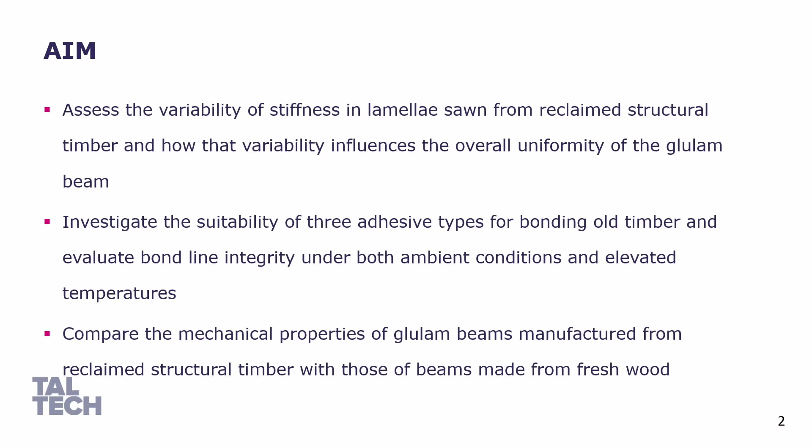I started with a review of literature, and then I documented all of the test specimens that we had: 39 lamellas from Norway spruce that were collected from the demolition of an approximately 100-year-old log house located in Norway.

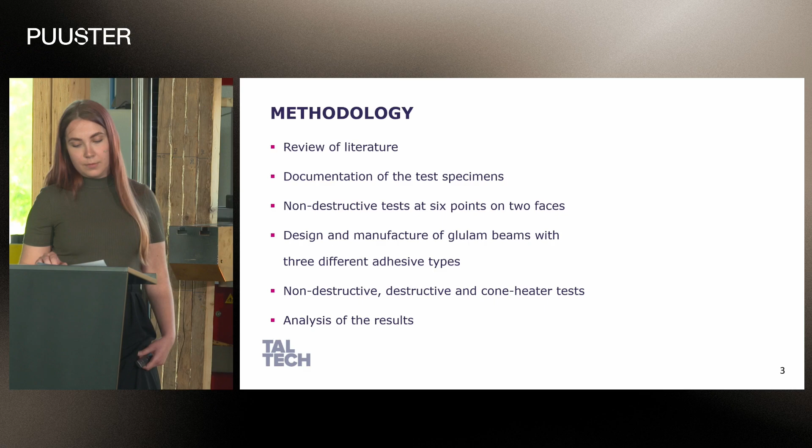Then I did 4-point non-destructive bending tests on all of the lamellas, on 6 points and 2 faces, to find the global MOE.

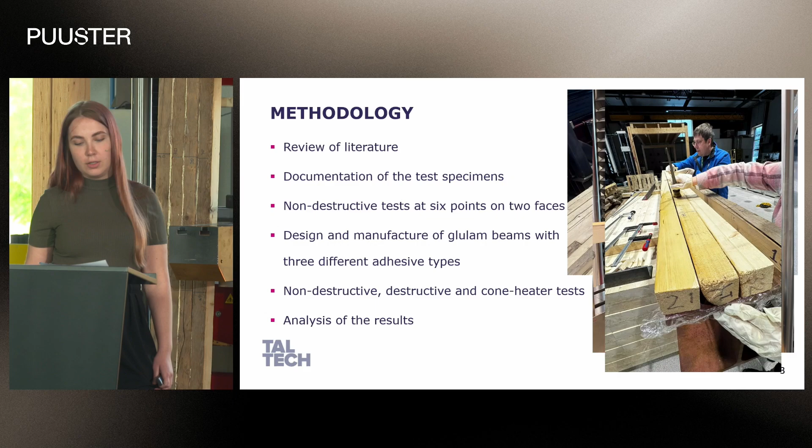The design procedure of glulam beams was based on the previously collected global MOEs and cutouts, and the manufacturing of the glulam beams consisted of applying 3 different types of adhesives: PUR, MUF, and PRF. These were applied with brushes, and the pressing was done with clamp screws.

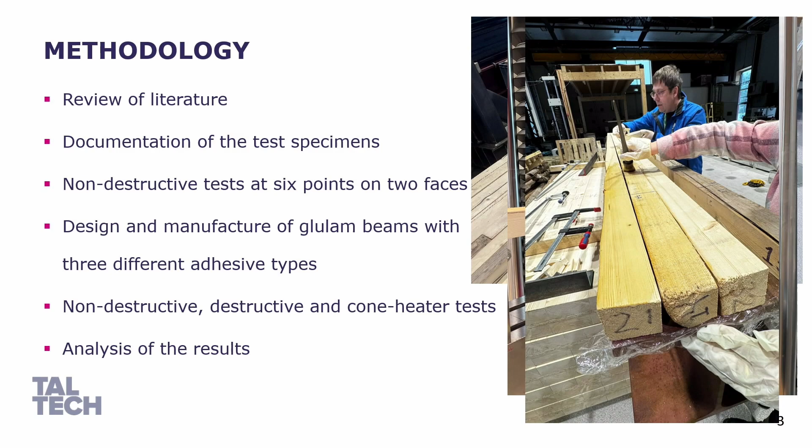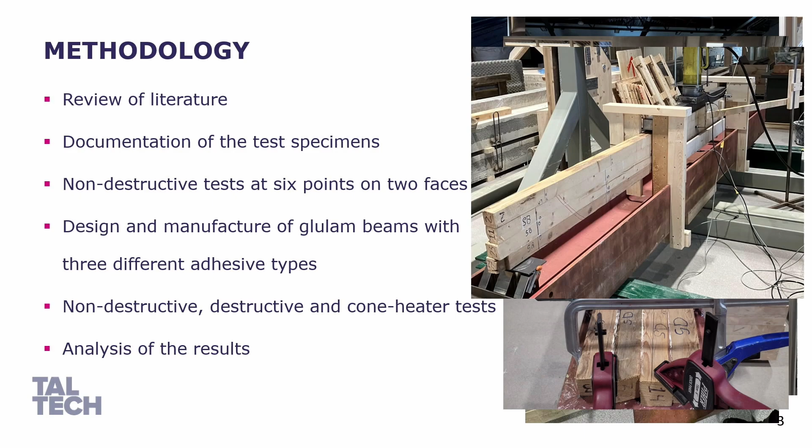Non-destructive bending tests were performed on all of the glulam beams to find the global and local MOEs, and also a 4-point destructive bending test was performed on 3 glulam beams that were bonded with all 3 different adhesive types.

Finally, cone heater tests were performed on all 3 adhesive types to evaluate the bond line integrity at elevated temperatures.

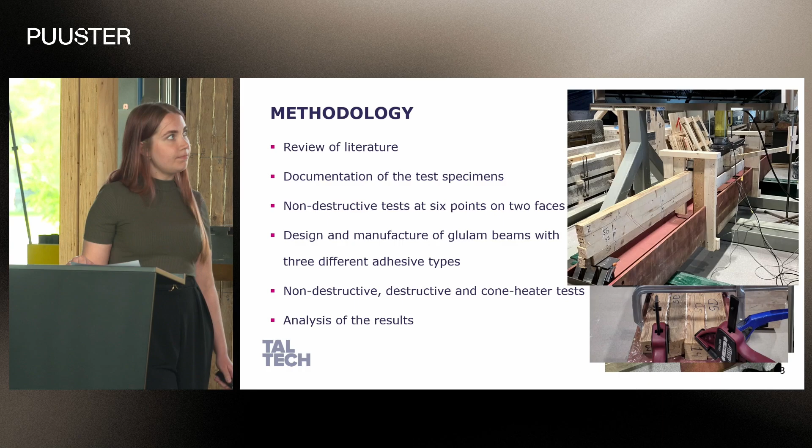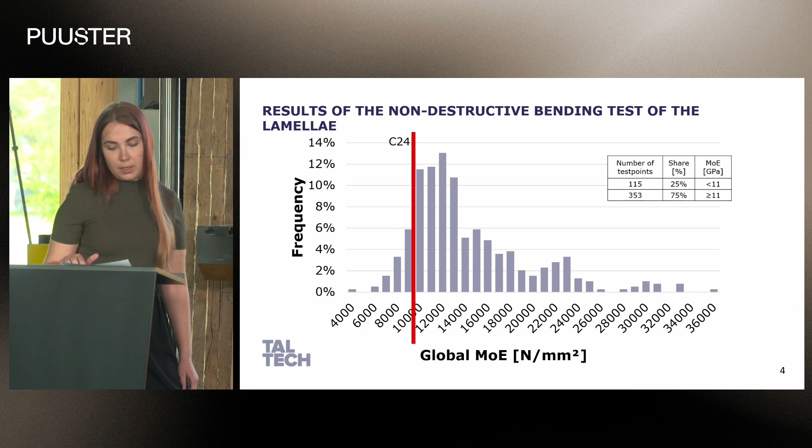And the results: this graph illustrates the variability of all the global MOEs collected from the testing of the lamella, and the variability was approximately 35%, with 75% of the results exceeding the stiffness of class C24.

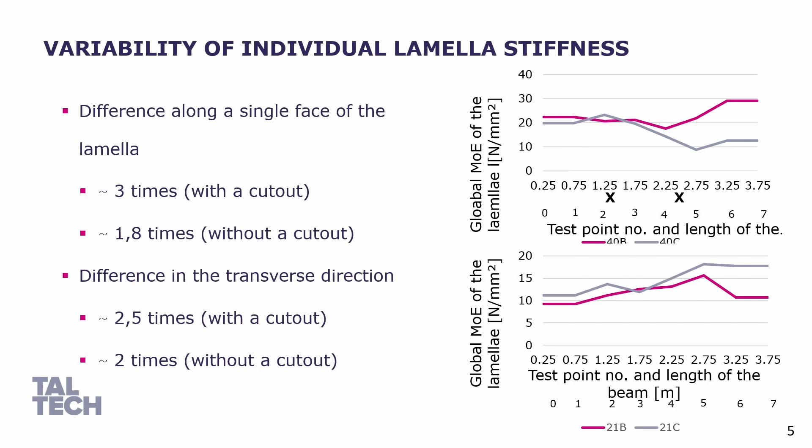On one face of the lamella, the largest stiffness difference was approximately up to 3 times, and in the transverse direction at one test point, the largest stiffness difference was approximately up to 2.5 times.

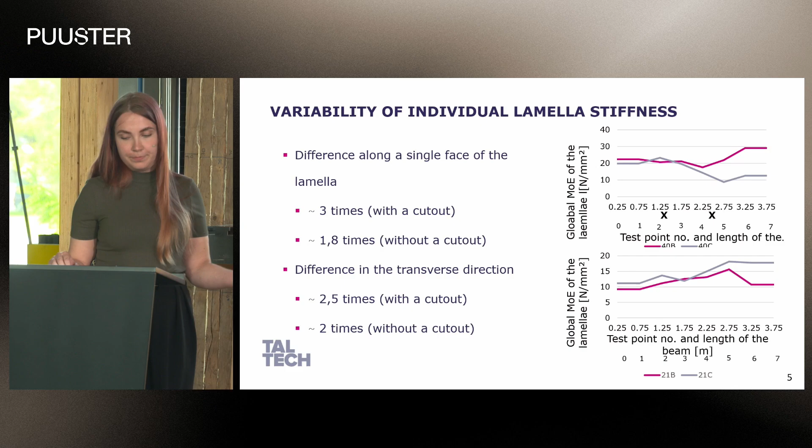When planning the glulam beams, it was decided to plan 3 super beams made from the lamellas with the highest global MOEs, and 5 normal beams. The super beams are marked with SB.

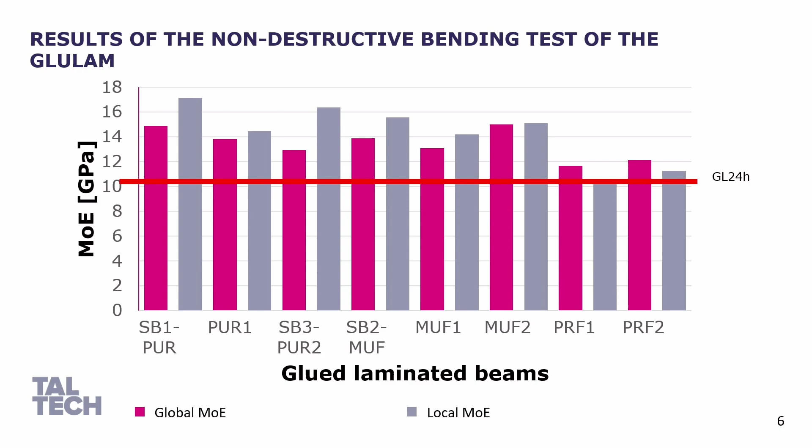The 2 beams that didn't were bonded with adhesive PRF, which had a much thicker consistency and was more difficult to apply evenly with brushes.

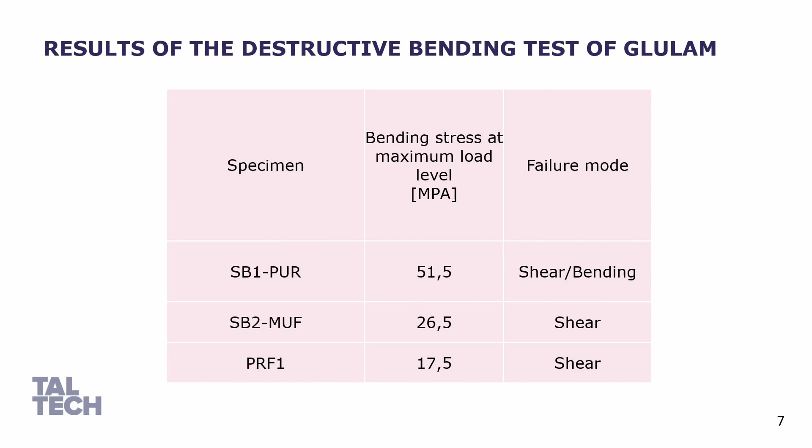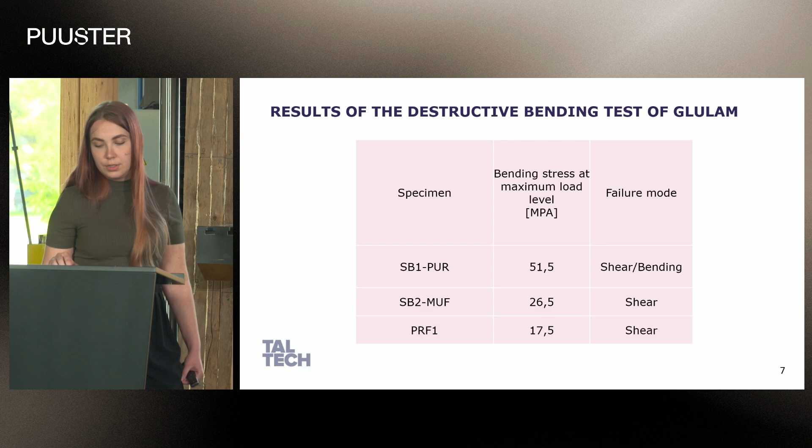The reason for the shear failure in the bond line was the uneven surface of the lamella, caused by the cutouts, rounded corners, and the glulam manufacturing method.

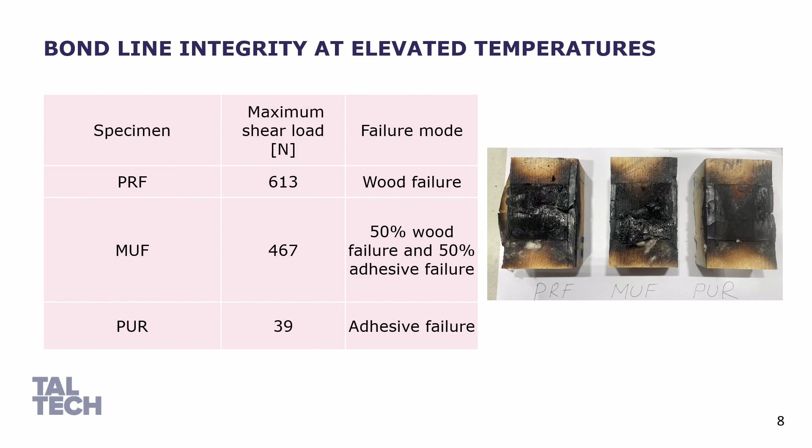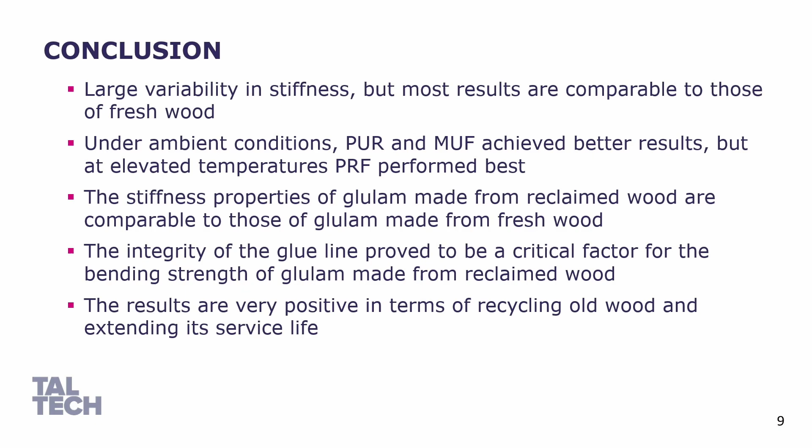In conclusion, there was a large variability in lamella stiffness, but most results are comparable to those of fresh wood. Under ambient conditions, PUR and MUF achieved better results, but at elevated temperatures, PRF performed the best.

The stiffness properties of glulam made from reclaimed timber are comparable to those of glulam made from fresh timber. The integrity of the glue line proved to be a critical factor for the bending strength of glulam made from reclaimed timber, and the results are very positive in terms of recycling old wood and extending its service life.